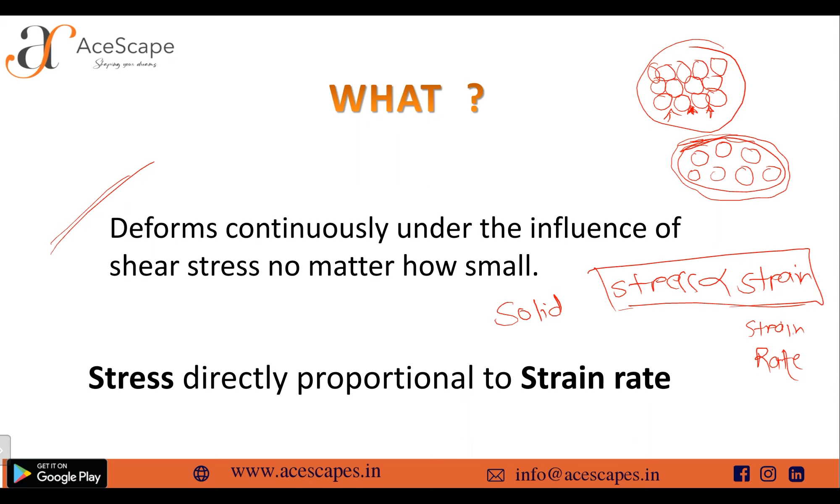And as you all know, the fluid flows, and all those definitions and meanings are correct. Only you need to understand that there is a difference of force in molecules. Okay. So then comes the second question. Why are we going to learn this fluid mechanics? This is a wholesome question. It covers all the ideas of why we are going to learn this difficult subject, fluid mechanics. So it comes to the applications only.

As you know, rain comes, the seasons change. All these natural phenomena are governed by fluid mechanics. And understanding the law behind those natural phenomena, we have developed the applications of fluid mechanics. The basic idea is that designing a car, designing an industry, many industrial processes, reactors, all are governed by fluid mechanics. So that's why it is important to learn fluid mechanics.

Many of you would be from food technology, dairy technology. So if you are mixing milk, that is going to be in a reactor or some vessel. There also you need to stir that vessel properly. Yes, sir. Yeah. So there also fluid mechanics is surely involved.

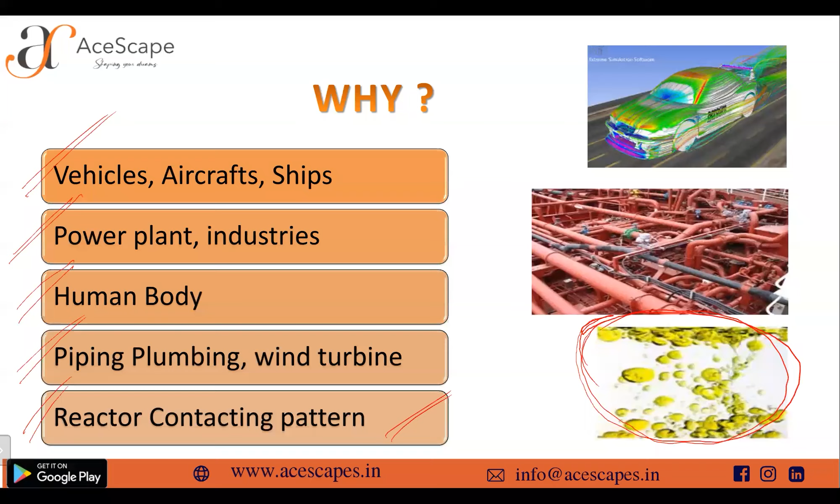After this why question, the most important thing we are going to learn in fluid mechanics is answered by how. In the complete book and complete syllabus, we are going to discuss how to apply fluid mechanics. That's why the branch is differentiated into dynamics and statics. So in statics, how many of you have traveled on a boat? Many of you are from Kolkata, right? Okay, so you understand better than me how a boat goes.

That concept involves buoyancy. You know buoyancy? Yes, sir. Okay, so buoyancy is governed by the statics part, and also the pressure of a liquid column. These are all governed by statics. And dynamics involves fluid in motion. You all understand the basic difference between dynamics and statics, so I won't go into detail.

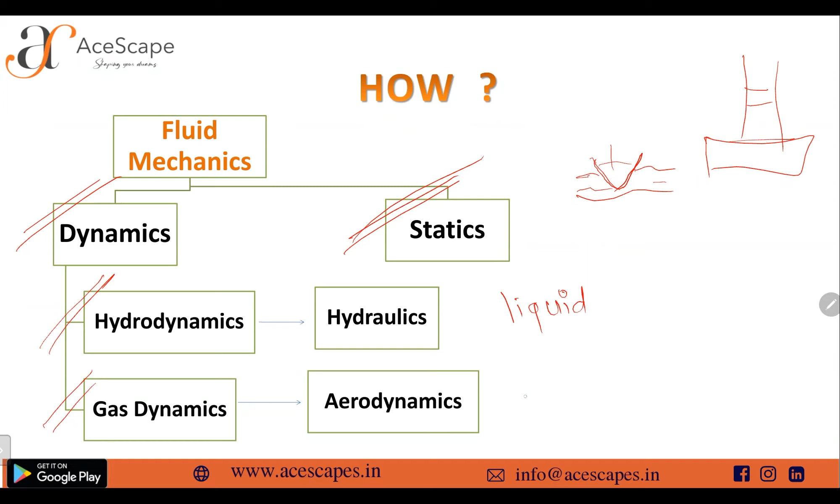Now dynamics is further divided into hydrodynamics and gas dynamics. Hydrodynamics involves liquids, and gas dynamics involves gases. Hydrodynamics includes liquid, and if the liquid is water, we call it hydraulics. Similarly gas dynamics involves all gases, but if the gas is air, it's aerodynamics. So what are the applications? We have to connect the dots: how the real-life examples we see fit into these branches.

In recent times the bulldozer is a hot topic. How many of you know the JCB bulldozer? Yes, sir. Okay. That JCB involves a major part of hydrodynamics and hydraulics; its most common application is lifting. Fluid has some energy because of its mass, and that energy is employed in lifting materials and cranes. We are going to learn that in detail in our classes.

In this first session I'm going to tell you what we will learn in the complete syllabus. The most important thing is we will go by understanding applications like this JCB, so you will always remember that hydrodynamics and hydraulics are used in a JCB. We'll follow this approach and go into detail in the coming sessions. Now I will just give you an overview of the subject.

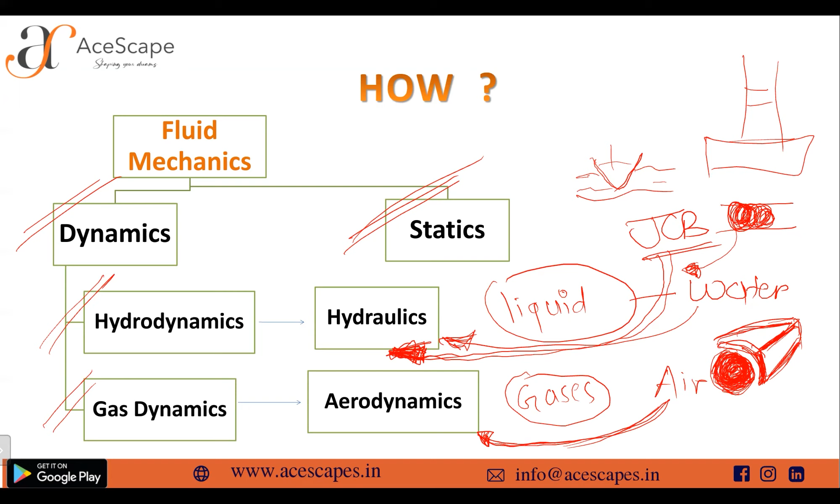So how we are going to learn: we will consider the examples first, then we will go and connect the topics, the concepts. So going ahead, the approach to answer 'how' - this is the topic I wrote here. So first, I told you we'll go through application.

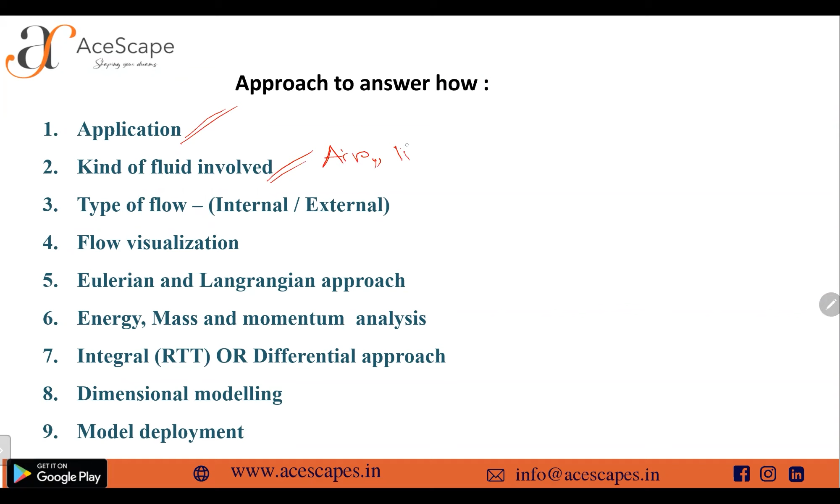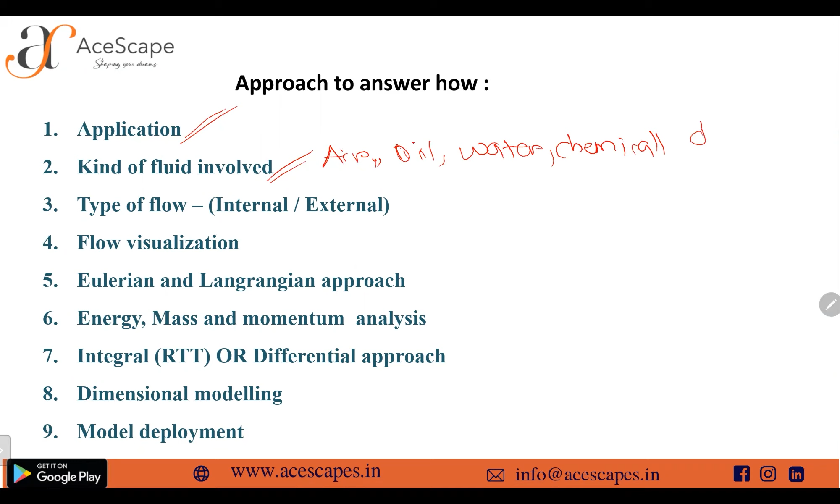So the second thing involved is the kind of fluid involved. What is the fluid we are dealing with while considering an aeroplane? It is air. While considering a pipeline, what can be the fluid? It may be oil, it may be water, it may be some chemicals. So all the fluids have different behavior.

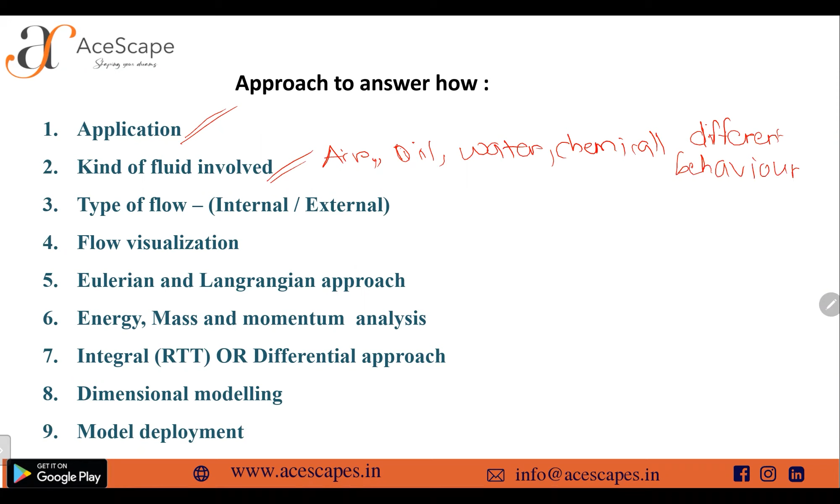The basic idea, the first point we should consider is what is the application, then what is the fluid involved in that application, then comes the type of flow. So, how many types of flows are there? Laminar, turbulent, and streamline flow.

I would like to tell you that there are a number of ways to classify fluid flows. The first comes viscous, inviscid, internal flow, external flow, laminar flow, turbulent flow, compressible, incompressible, natural flow and forced flow, steady flow, unsteady flow. All this we are going to understand in detail in coming lectures.

Currently I will focus just on internal and external, because while considering the example, the most important aspect we should see is whether the flow is internal or external in that application. I will give you two examples for internal and external so you will understand properly.

Suppose one car is going on the road. While going on the road, air is flowing over the car. The car is actually moving, but air is flowing over the car because we are cutting through the air. So what kind of flow is that - is it internal or external? External, okay, very good. So that is external flow.

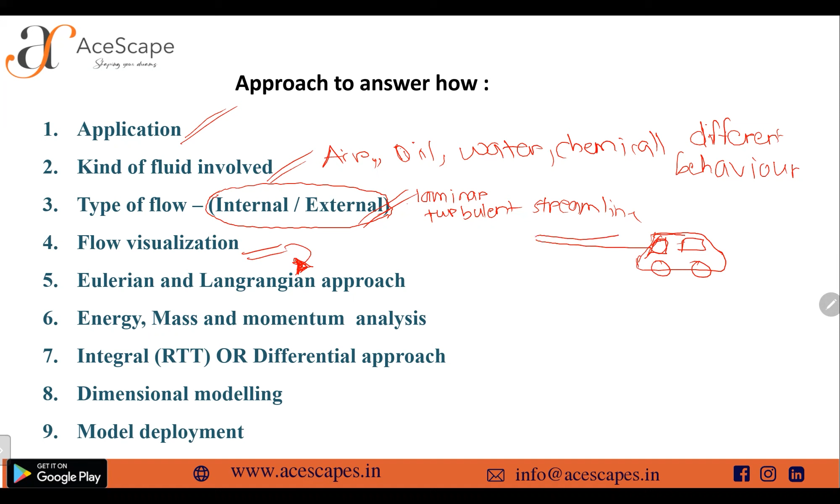It may be going inside, like inside the window, or above the car, from front to above. What I'm going to say is fluid may flow anywhere - it may go from below the car, between the tires also, it may enter through your window also, it may go above. It will apply pressure on the window, the mirror, the glass, the front glass.

So we need to visualize how the flow is flowing over this car. This is just one example of the car. Now consider - I will give you the example of milk.

If you are mixing milk and you have added, let's say, lemon juice in it, or any taste, or any flavor or color - if I add the chunks of color or that material, it stays there only. If I will not mix it, it will remain there only, right?

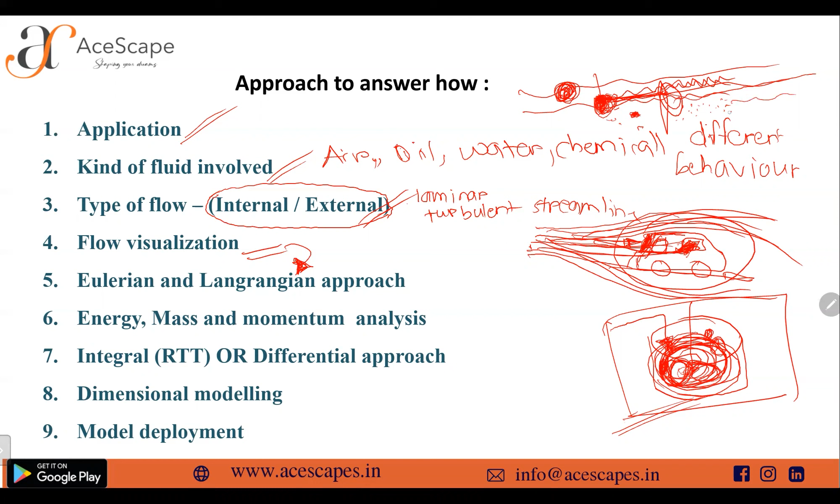And completely what we are adding, is it useful, getting utilized or not? So that's why it is important to understand the behavior of this flow. The visualization means every particle of ink we are visualizing, where it is, how it is going. So that comes under flow visualization.

And then the methods of visualizing flow are two methods: Eulerian method and Lagrangian method. Some of you already know these terms, Lagrangian and Eulerian method. So now comes

the example of that river. So here it is, a river. Suppose I throw a tennis or plastic ball here. So this plastic ball is flowing with the river.

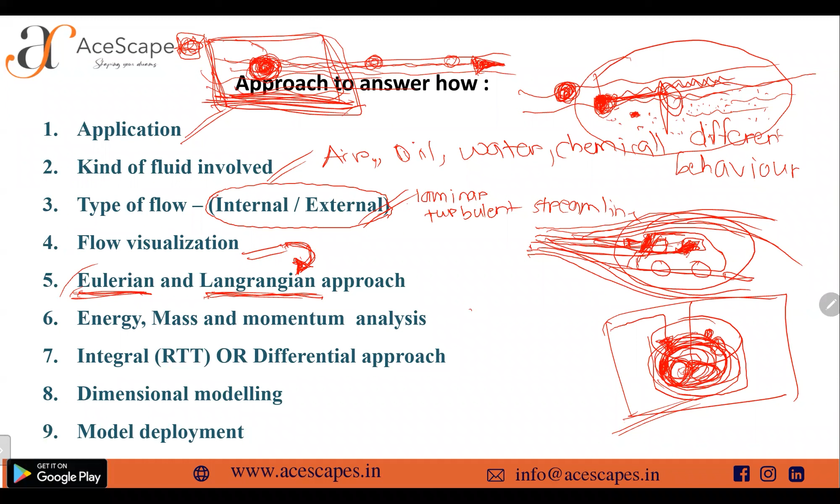And now I am considering this part only, this part only of the river. In this much part only, I am just watching how the ball is moving up and down on the water. So I am considering this part of the river, not considering the whole river, not considering how that ball is flowing.

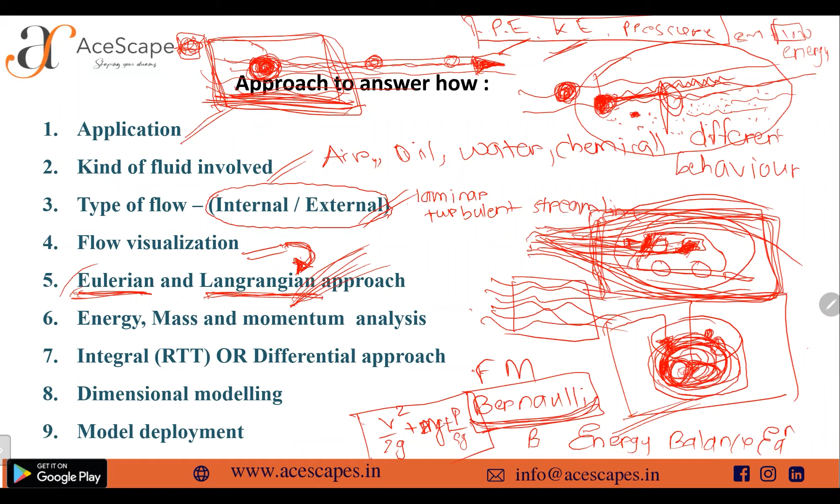v²/2g काइनेटिक एनर्जी को दिखाने के लिए, डेटम को दिखाने के लिए z, और mg से हम दिखा सकते हैं पोटेंशियल एनर्जी, और प्रेशर के लिए P/ρg. ओके, सो दिस रिमेन्स कांस्टेंट. व्हाट बर्नौली सेज इज किसी 2 पॉइंट पे किसी फ्लूइड की एनर्जी कांस्टेंट रहेगी. ये इक्वेट करते हैं किसी से हम.

तो ये जो बर्नौली इक्वेशन वाला पार्ट है ये आपका 10% ऑफ फ्लूइड मैकेनिक्स के एप्लीकेशन में आएगा, और इसमें से 10% प्रॉब्लम आपके आएंगे ही आएंगे. मैनोमीटर बहुत लोगों ने सुना होगा, मैनोमीटर, फ्लो मेजरमेंट डिवाइसेस एंड मेनी डिफरेंट थिंग्स. Everywhere there will be application of Bernoulli equation. So that thing we are going to learn.

So this 6th topic is completed, that means we'll complete it. So till now we have completed 50-60% of the syllabus of fluid mechanics. Overview, I am saying overview, I haven't completed the syllabus.

अभी तक किसी को लगा कि मतलब काफी हार्ड है, मगर प्रॉब्लम सॉल्व करने के पहले पीछे की बेसिक आइडिया पता चल गई तो हम प्रॉब्लम को कनेक्ट कर पाएंगे. सॉल्व करते समय हमें पीछे का कंसेप्ट मालूम रहेगा कि इसका एप्लीकेशन क्या है, why we are going to solve this problem. सो दिस अप्रोच आई एश्योर यू कि ये आपको बहुत काम आएगी जब आपको पीछे का कंसेप्ट पता रहेगा कि हम क्यों कर रहे हैं, हम पढ़ तो रहे पर क्यों पढ़ रहे, क्यों सॉल्व कर रहे इस प्रॉब्लम. ये जब आपको पता रहेगा

you will put different approaches to solve that problem. That is the beauty of understanding the application. इस way से पढ़ने का वही एक फायदा होता है कि हम जब प्रॉब्लम सॉल्व करने जाते हैं तब हम रुकते नहीं है, हम कुछ ना कुछ लगाते हैं उसमें. सो दैट्स व्हाई आई एम सेइंग कि अगर हमें ओवरव्यू पता होगा सब्जेक्ट का कि हम क्या कर रहे हैं इस सब्जेक्ट में, तो दैट थिंग विल डेफिनेटली हेल्प यू.

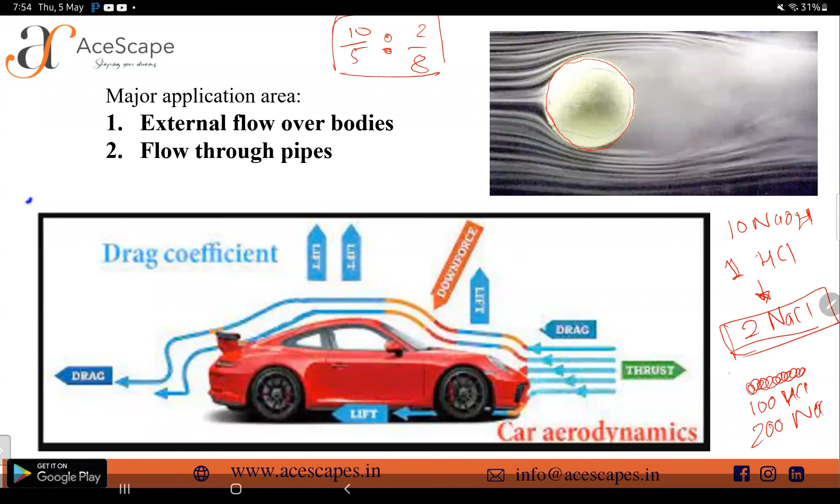So there will be some converting parameter ratio. Let's say this is a ratio of conversion. So that ratio is governed by a number called dimensionless number. How many of you know the term dimensionless number? और एक अच्छे एग्जांपल से समझा तो 2x plus 5 gives 20. Okay, so what will be the value of x? Okay, leave this example also.

So the basic idea is, if you have to convert a small prototype into a big one, we will give a multiplication factor to grow it to the large scale. Dimensional modeling is that conversion factor, that multiplication factor. If I want to get 100, then I will multiply 2 with 50. Means I am growing the small number 2 50 times so that it becomes 100.

अब समझा किसी को? Okay, we'll see in detail. I'm just giving an overview. We will give a proper example for this dimensional modeling and dimensionless analysis. So what I wanted to say is,

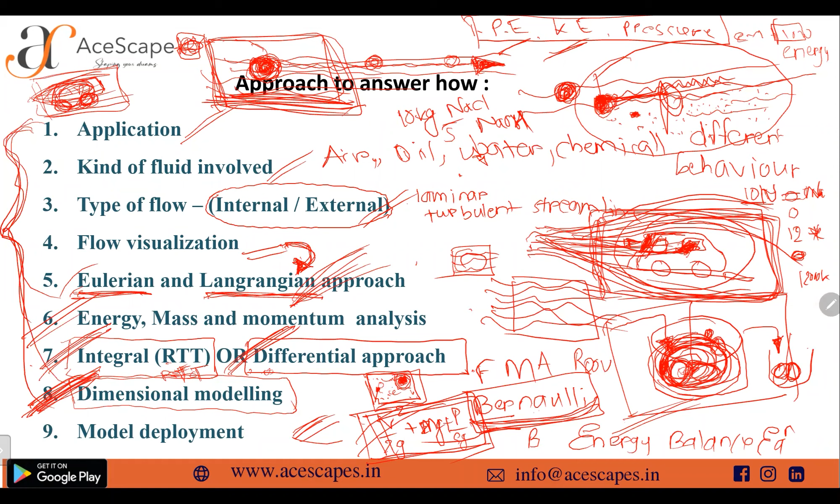so far we have learned how we will apply fluid mechanics by learning the flow behavior at any particular point, or considering some room, any volume, and then we will apply it to the models and applications. So these are major applications of fluid mechanics.

External flow में car वगैरह आ जाता है, and things which go in fluid like a ball and the shuttlecock. So if the car is moving in this direction, the air will put a pressure on this front glass, this body. It will go above, it will enter your window. So all this will be governed by fluid mechanics, and we will learn fluid mechanics by this example only. एक example में आपका पूरा fluid mechanics complete हो सकता है, if we wish.

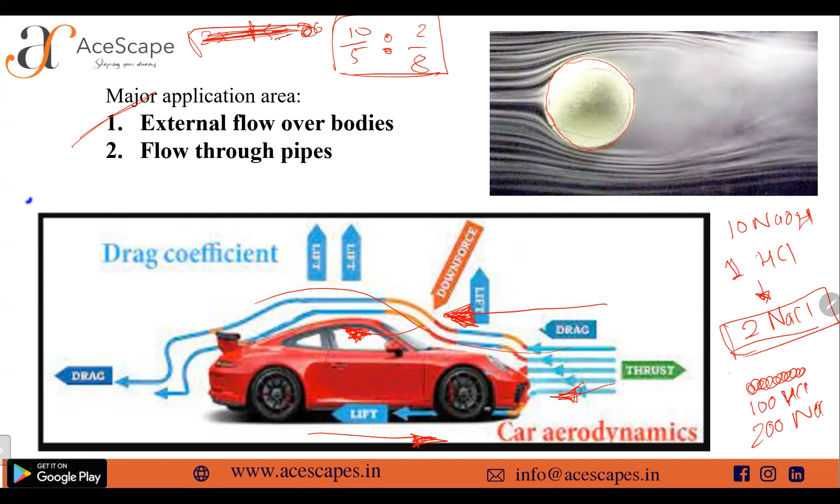Many of you will enjoy watering the garden. बहुत लोगों को पाइप के मुंह पर दबाकर, that is closing half of the pipe and increasing the pressure of that flow. How many of you enjoy? Yeah, so many people enjoy that. I personally enjoy it.

So पाइप के अंदर कैसा फ्लो होता है, that we are going to see in detail in internal flows. इस पोजीशन पे क्या प्रेशर होगा, what will be the velocity, the stress, the viscosity of the fluid, how the flow will go inside the pipe. All the topics of fluid mechanics, considering this example, you will understand, and the syllabus will get completed. We'll solve problems. If we learn the example, then you will easily solve the problems.

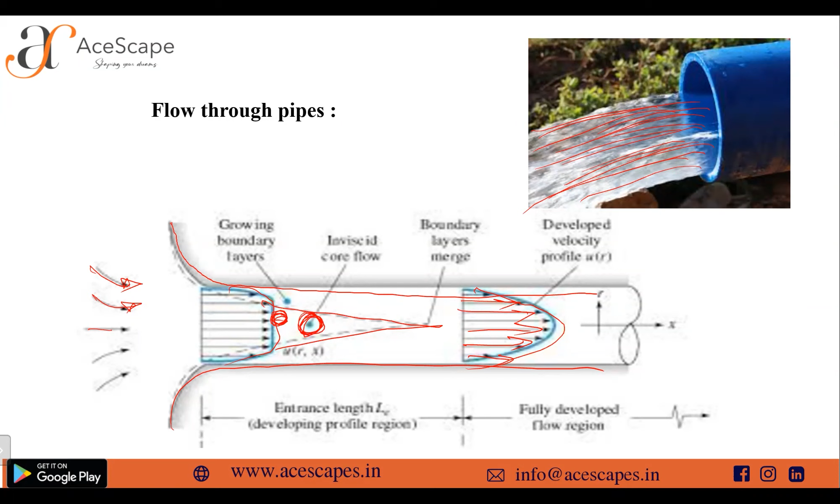So that's all from my side. This is an overview; we haven't learned this in detail yet. Everything I discussed, we will go in detail for that. This is a basic overview, chapter 0, which means कि मैं एक बार में आपको पूरा subject बता दूं कि what is fluid mechanics. So I hope it was helpful for many of you.